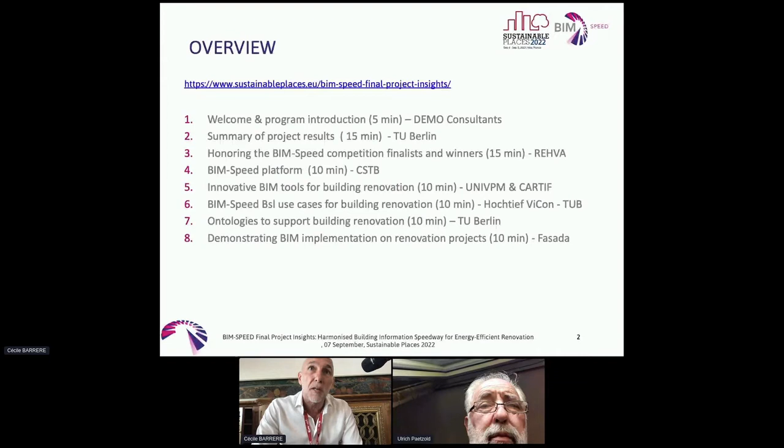I have the privilege to introduce the speakers of today, of the BIM SPEED consortium. And before doing so, there is one thing I would like to add. The project is almost coming to an end, a 4-year project. BIM SPEED, it is about speeding up BIM facilities. Well, that is really oversimplified, I would say, but it's always good to tease you a bit and to get your attention, because in the coming 1.5 hours it will be explained way better by all my project colleagues than I just did. Today is the last industry day as well, so we did see that there are people attending who used to be also present in the former industry day, so that's good to know.

And well, one of the highlights, in my opinion, is of course not only talking about content, but also giving the prize, because there has been a real competition as well in this project. But before going to that point of the agenda, I will give the floor after this to Timo Hartmann. He's Professor at TU Berlin and the coordinator of BIM SPEED, and he will give you just a highlight overview of all the project results of BIM SPEED. Then, as mentioned, we will move on to the honoring of the BIM SPEED competition. That will be done by Jasper from REHVA. And followed by, well, you could call it the core of the project, the BIM SPEED platform. That will be presented by Nicola Pastorelli from CSTB.

That's the only one who did not have to travel, I think, or just a little, because he's from this area. Then followed by some of the innovative BIM tools for building renovation. We have many more, but we have selected 2 of the best, and they will be presented to you by Serena, I think, remotely from Italy. And then Sonia, she did arrive. Good morning, Sonia. Buenos dias. That's another one I know.

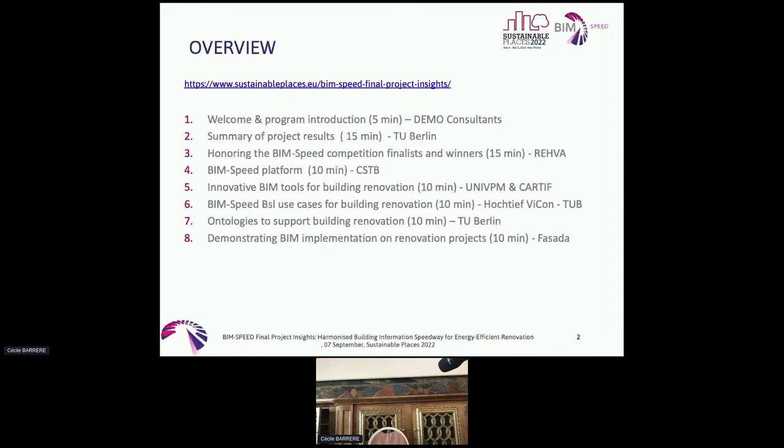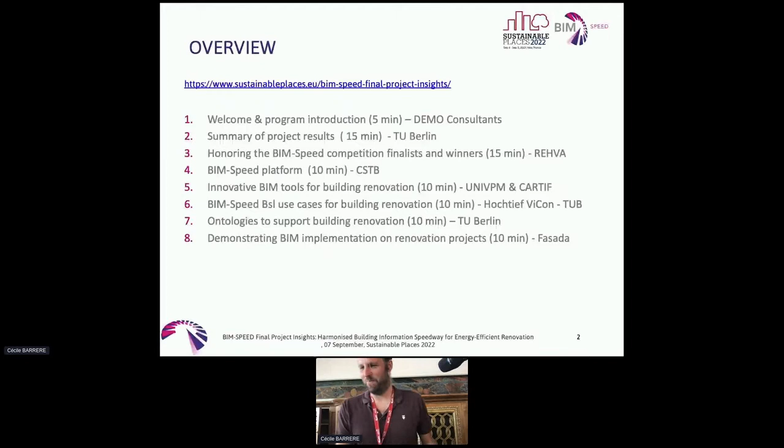So. Do you have a slide? No, you don't. I don't have slides. Thanks, Andre. It's always dangerous, right, to have the professor speak first when you're already late. But I don't know. Let's see.

But thanks for the introduction, and it's really nice to sit here as the coordinator of the BIM SPEED project at almost the end. So I guess we have less than 2 months to go, and then the project is finalized, and we had really nice 4 years together, I think, in the consortium, but also with the people that are here watching, with our user group and community of practice and so forth. So thanks for joining.

Yeah, I was asked to give an overview of the project in the session, and I'm happy to do this. And I thought, how do I do this? Do I prepare some slides and show some technical details? But that doesn't help, because the program we have will show you all the technical details later, right? So we're going to have great speakers really presenting the major innovations that we were able to come up with in the last 4 years. So what I was thinking, and I started reflecting a little bit, is also looking a little bit at the history. So I guess it was more than 5 years ago when Rizal Sebastian, who's no longer on the project, contacted me and said, hey, there's this great call out there, BIM for renovation.

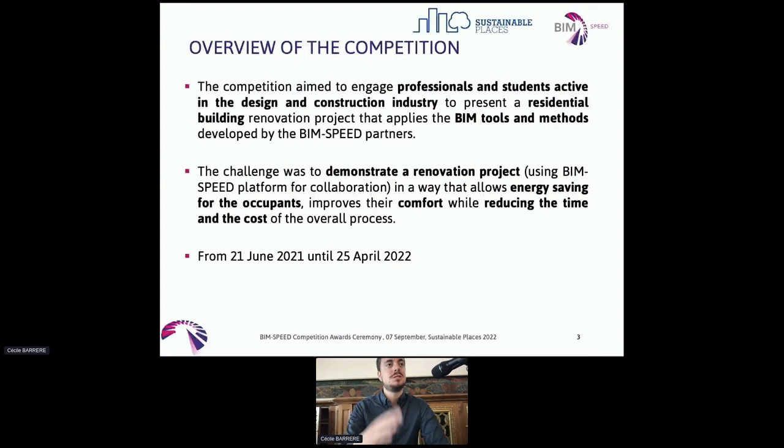How did they have to submit their project? They had to use the BIM SPEED platform, to which they had access through the KROQI platform. They had to fill in a report describing all their results, so the indicators I just mentioned regarding energy savings and comfort. They had to describe how they accomplished this by using the BIM SPEED tools and also other available tools, and how they combined them.

Next to this, they also had to submit an IFC file with their BIM design model and a proposal for it. And last but not least, some visual materials and an infographic of how the project looked, that gave a better description.

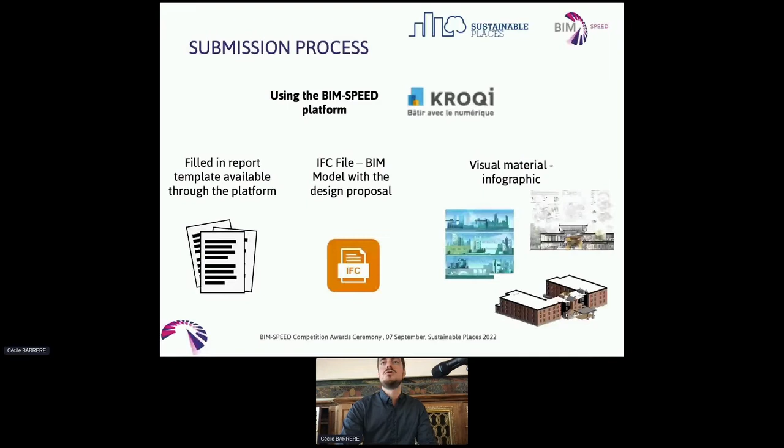Who were the jury? The jury were a combination of people with an architecture and engineering background. It was a good mix of people from research, academia, industry, and also real estate finance, so a good mix of opinions. I want to thank the whole jury for their participation, and specifically Chiara Di Pasquale and Andras Ronay for their very active contributions to the competition. So really, thank you to the jury.

Regarding the teams that competed, there were 8 registered teams from across the world, not just from Europe but from Africa and South America as well. It really had a global scale to it, and the teams made a strong effort to use the BIM SPEED tools and demonstrate their results.

Now to the key part of the presentation: the award ceremony itself, and who the winners are who will receive this trophy and the other awards we have lined up for them. Unfortunately, the winners could not join us in person, but they are here with us virtually.

And the winners are Team BIM from ENSTP, the National Advanced School of Public Works from Yaoundé, Cameroon. They had very good feedback from the jury and really made a lot of effort to demonstrate the energy savings and comfort in a project provided to them by BIM SPEED. Congratulations in particular to Idris and Charlene, who will be presenting. Thank you for giving us the floor.

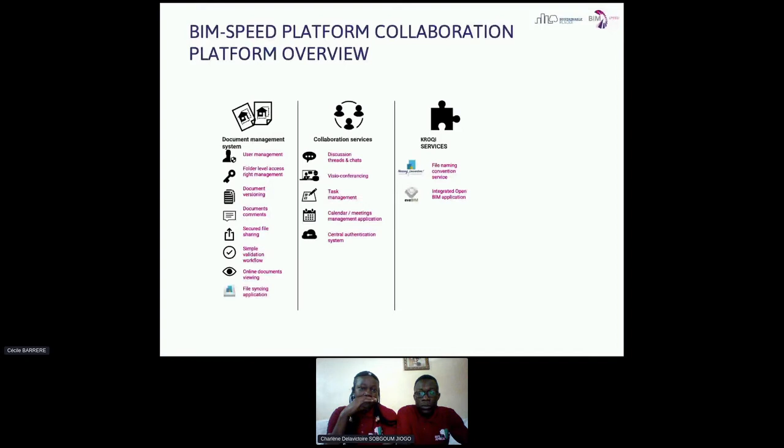On top of these two main types of collaboration services, there were already pre-existing KROQI services like the naming convention we just heard about. CSTB is also providing a tool named eveBIM, a BIM viewer you can install on your machine to view BIM files.

This is where, on top of that, we extended the platform to bring extra services showing what kind of renovation services could be integrated inside the platform.

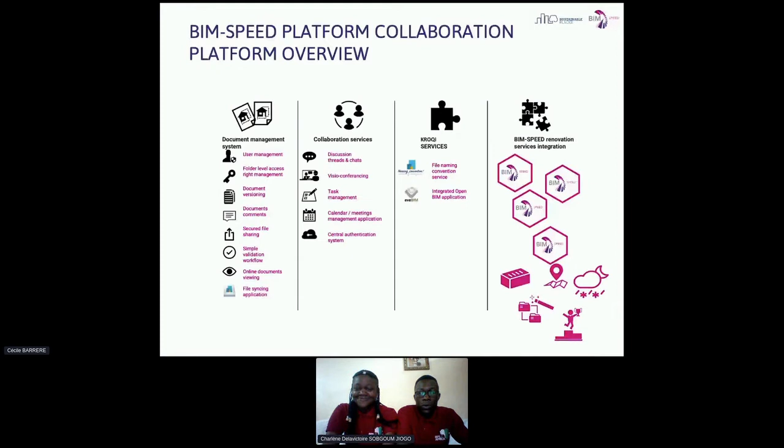We extended the store with a packaging option where we can create a set of services dedicated to renovation. We created features especially for the competition we just talked about, to enroll users and share files and things like that.

Very briefly, this is the core of the platform, and all these services are exposed through APIs. This is where we integrated different types of services relevant for renovation, and the project was framed so that each step of a renovation has a set of services which was demonstrated.

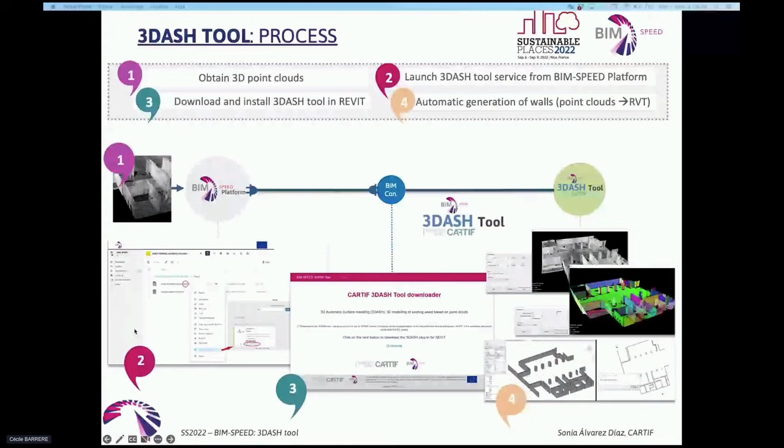I'm going to show you a demonstration in the Warsaw demo site in Poland. But this tool was also tested in another demo site of the BIM Speed project, the Vitoria demo.

About the Warsaw demo site, as I mentioned, the main goal of the project was to renovate and adapt an underground passage. The documentation of the existing space was out of date and only available on paper. It was also a pilot project for the city of Warsaw to test open BIM standards.

You can see here in the image that on the left side is before the preprocessing of the point cloud, and on the right side is after the preprocessing. You can see a red line - that's because we decided to only do this demonstration on the left part of that line.

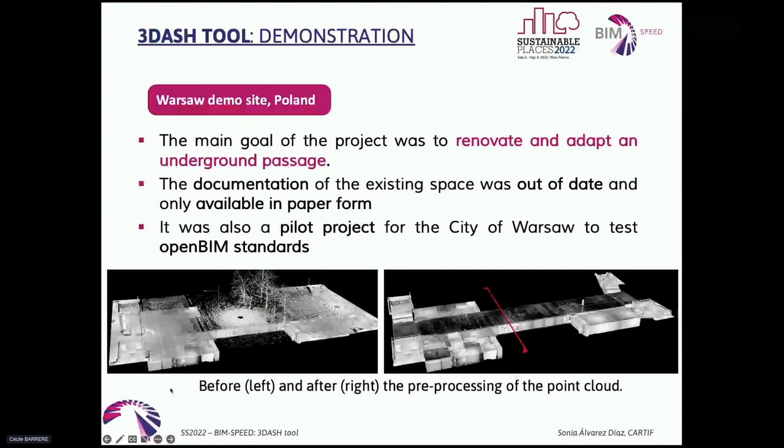So here are some steps of the tool. The user needs to start the tool in the Revit software. The first step is to load and analyze the point clouds. You can see here the first step of the tool - you have to select the point cloud and the 3DASH tool starts working.

The second step is the pre-processing. You can see here the point cloud. Depending on the parameters the user decides, those point clouds are selected more separately or something like that. So the user can modify the dimensions or the final results of the tool, depending on the parameters.

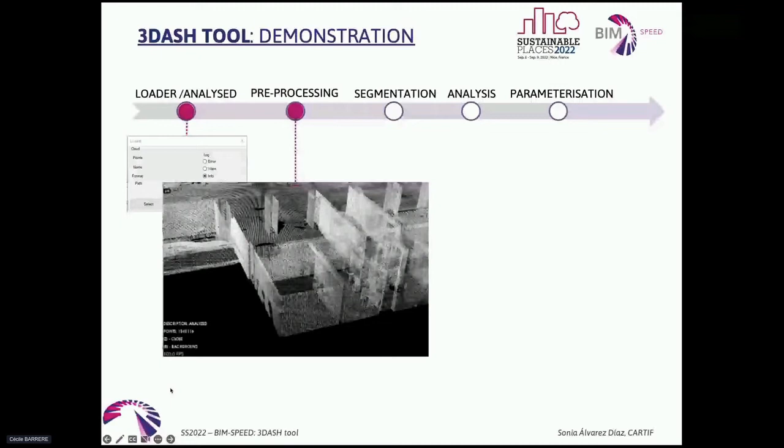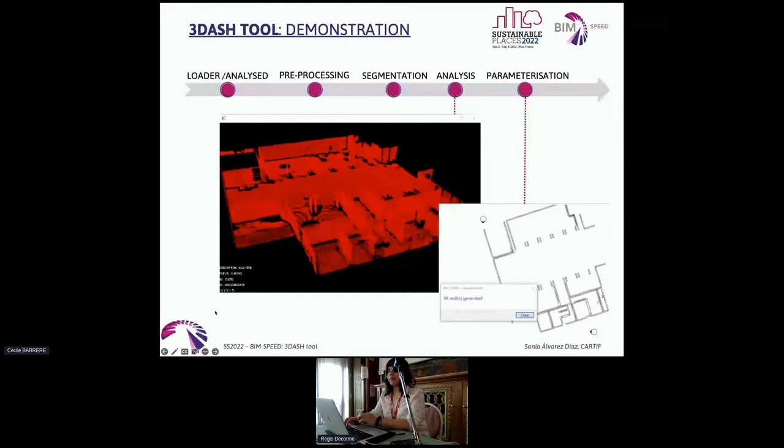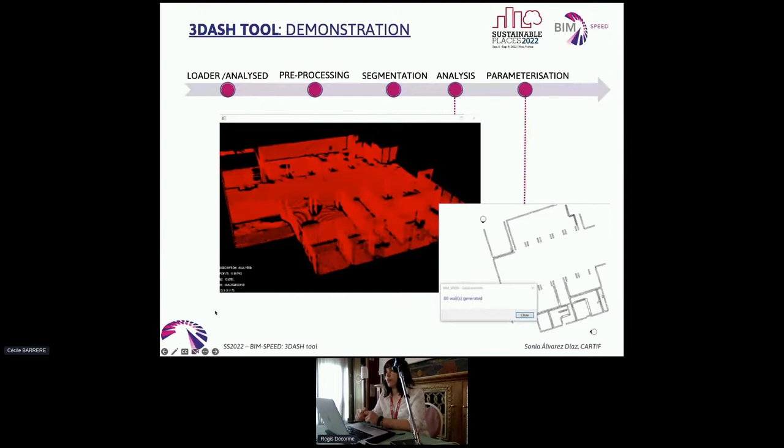So the last step is the parameterization. In this step, to generate the walls, the user needs to decide what type of wall is going to be created. All the walls have the same properties in this case. So here, 88 walls were generated by the tool.

So here are some results about this demo, comparing the use of the 3DASH tool with the traditional way. For the traditional way, the creation of the model from the pre-processed point cloud took 2 hours and 10 minutes, and 36 walls and 12 columns were modeled. Using the 3DASH tool, as a final result of the application, in this demo 88 walls were generated automatically in more or less 2 minutes.

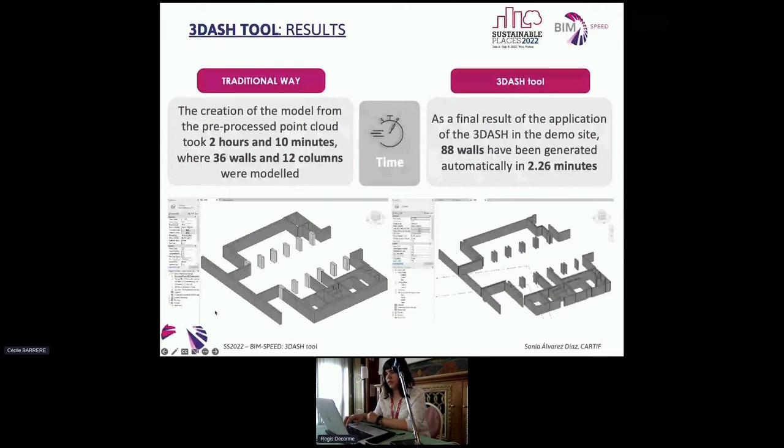So as a consideration, the use of the 3DASH tool can reduce time because of the generation of models, and for comparison with previous systems of modeling the building.

Compare this to the traditional way, where the user needs to generate the walls manually using the point clouds as a template. This is all manual selection of the points.

Here are some publications about the use of this tool. The first one was presented at a congress, comparing the scientific approach with the traditional one using the 3DASH tool. Another publication covers the use case for Building Smart, which my colleague Sharon is going to talk about later.

It's the next one. Yeah, is this one? No, the next one. Oh, sorry. Is this the one? Mm-hmm. Yeah.

Unfortunately, there's 6 minutes left for each. Okay, sure, I got it.

All right, so I will start with our use case documentation initiative at BIM Speed. Just a quick overview: as we all know, the BIM Speed project has developed several tools and methodologies for efficient renovation practice. As a standardization initiative, our coordinator, Professor Timo, came up with this initiative to document some BIM Speed use cases on the Building Smart Use Case Management System, capturing these tools and methodologies within information delivery manual standards and requirements.

Based on this, we have predefined sections of a use case document based on IDM standards, which has 3 sections in general: a general use case definition section, process definition, and exchange requirements. But with the initiative of Professor Timo at TU Berlin, we tailored this definition to also contain BIM Speed objectives validation and demonstration of use cases on project sites.

With this, we also provide users an example of implementation of these use cases, making it more easily accessible to all users in the built industry. We have 4 sections of a standard use case: the first, as I said, is a very general use case definition.

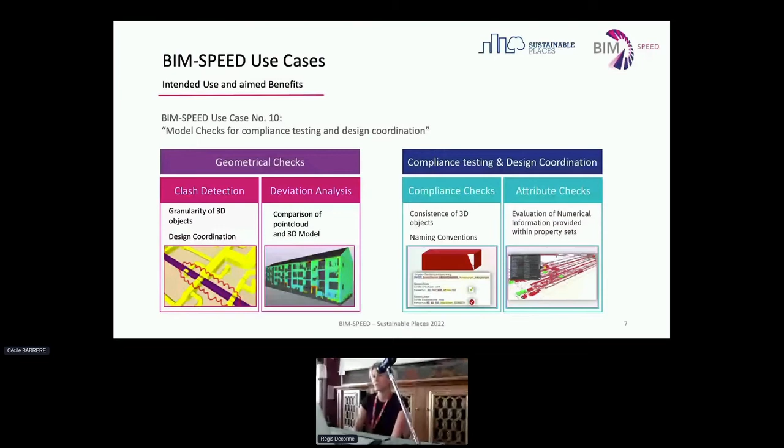That's a lot of information for the user, and we took this information and defined, out of only this deliverable, 3 use cases in the buildingSMART Use Case Management System: 2 about the geometrical checks, and 1 about the semantical and numerical checks for compliance testing and design coordination. And this is where I want to step in.

The use case we described provides in the first section the objective of the use case, which in our case is to assure that the information within the model is correct and in the right range of required information or values. So the scope is to provide reliability on the data inside the 3D model.

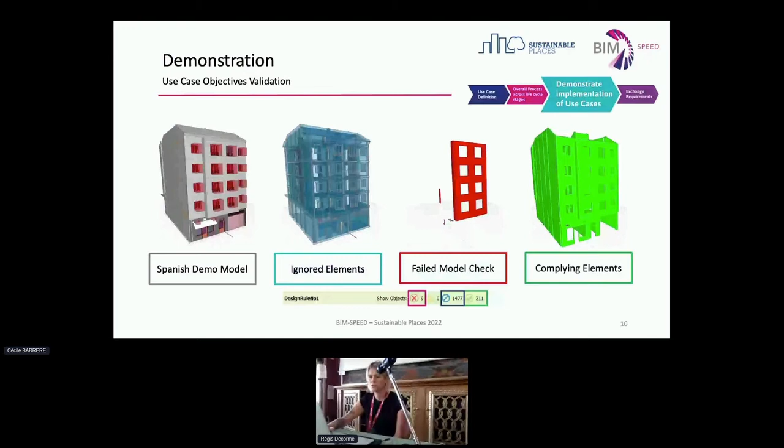We found that there are 9 elements that either did not have the parameter within the model information or had a wrong value. But luckily, the green ones are the elements that are fine, and that's a good result for this check rule, in my opinion. So the last slide for the use case description is a look at the exchange requirements.

As mentioned before, we focus here on the file exchange formats and don't break it down to each model element and each parameter. As input, we need the standards existing in the specific country, documents like the BEP, MIDP, and modeling guidelines, and all this forms the base to define the model check rules. Of course, we need an IFC file to be checked, due to the open BIM approach we are following. It's only relevant for IFC files.

The output will be, if needed, a report as a PDF or Excel file, but mainly BCF files that can be directly imported into the common data environment and given to the BIM author so that he is able to update and correct the model. By the end, we will have a checked 3D model that is compliant with the requirements and can be handed over to the following process step in the complete design coordination process.

So I'm coming to the end, and I will give you a short overview on the BIM Speed use cases that are already published and will be published. So we have 14 use cases that are already published and available on the UCM. We have 12 more work in progress in draft, and we are planning to publish them by the end of the project. So in total, we will have 26 use cases published on the UCM.

Okay, good morning, everybody. My name is Jerson from TU Berlin, so I will go very quickly to try to catch up. So sorry if I go very fast through some of the slides. So the idea today was to present to you some of the results regarding the ontologies. So I will talk to you about what was the motivation.

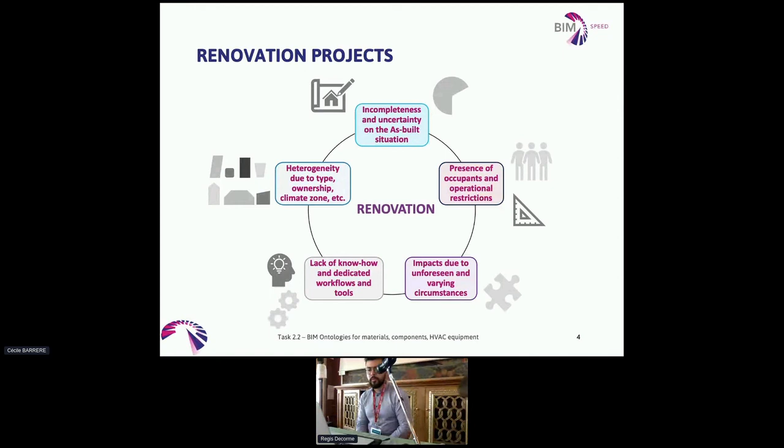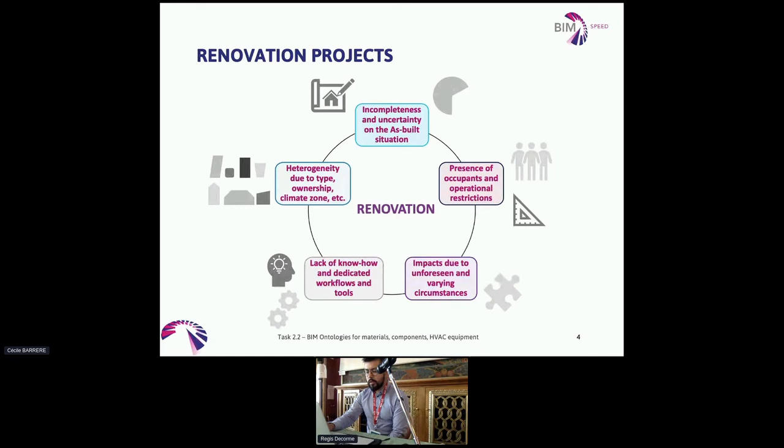As Timo mentioned at the beginning of the presentation, we have different characteristics of challenges in renovation projects, and we have a lot of heterogeneity from the building stock and so on. The presence of occupants during the renovations also changed the way the conventional construction activities are performed. And all of these bring different challenges that we think that if we are able to map the knowledge from the different experts and the different stakeholders regarding these different tasks and this domain, we can support or enhance the way the workflows are performed in renovation projects.

So for that, we were talking about knowledge representations. For those that are not familiarized with the idea, it is basically a set of symbols and text that describe information from a domain to help users to understand better that domain. If we think about ontologies, then we should talk about the concepts and the relationships between those concepts. And basically the idea is that this model will provide also a common vocabulary for users and will help create a shared understanding of the domain that we are studying.

So having a knowledge representation, having a model for a specific domain will help to improve the consistency and reduce ambiguity. It will help the interoperability, the reuse of knowledge, and the sharing of that knowledge. So going back to the challenge that we mentioned before, all these advantages of having a knowledge representation will help to tackle some of the challenges or the barriers we mentioned before.

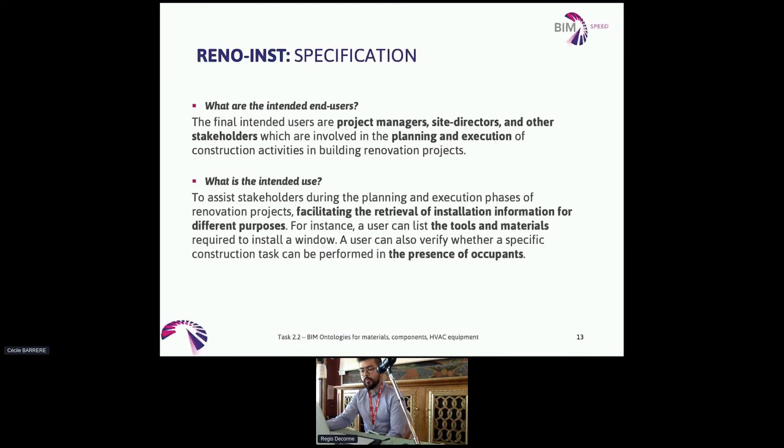The end users are project managers, site directors, and other stakeholders. And the intended use is to facilitate the collection, management and retrieval of key information to support the planning and the execution of the renovation activities. This is an overview of the model. One of the more important concepts that I would like to highlight is the constraints. We talked to experts, and they mentioned different restrictions during renovation projects, like the limitations of the space, the presence of occupants, so the activities have to be performed differently. So we map those constraints, and we included them in the model.

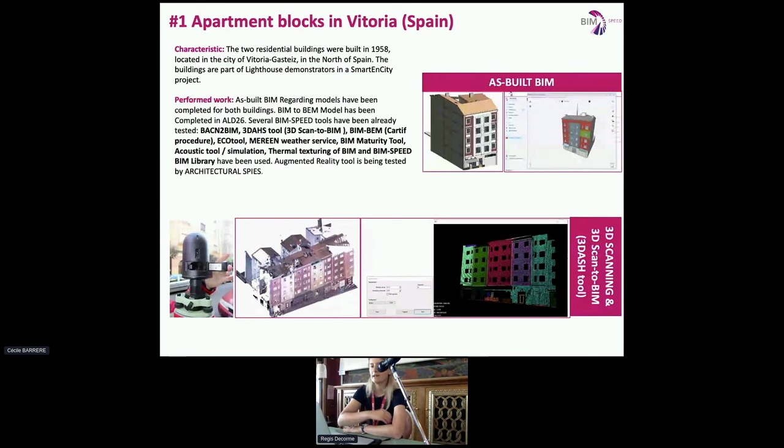Another tool that we have tested was the BACN2BIM tool. So we have access to all the data gathered from the building, for instance humidity or temperature, and we can access them with the BIM Speed platform. Also on this demo site, we have used visualization tools with augmented reality. So for instance, if the building is after renovation, we can see how the envelope looked before the renovation. And also we can see the thermal performance of the building with our mobile phone.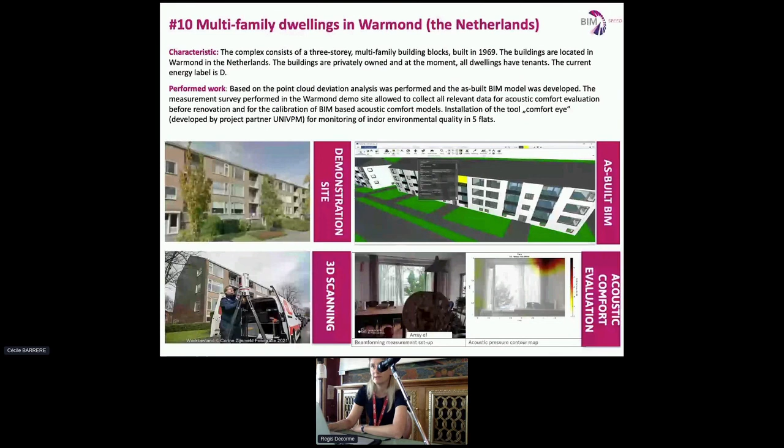Also in the building, Comfort Eye tools were installed, also developed by one of our partners. And this tool helps us to gather information on indoor air quality. And so later, this can also be very useful information for the preparation of the renovation and selection of the best renovation scenario.

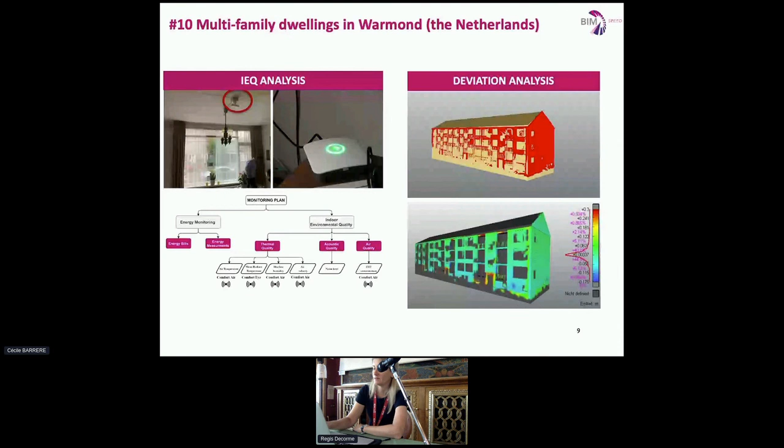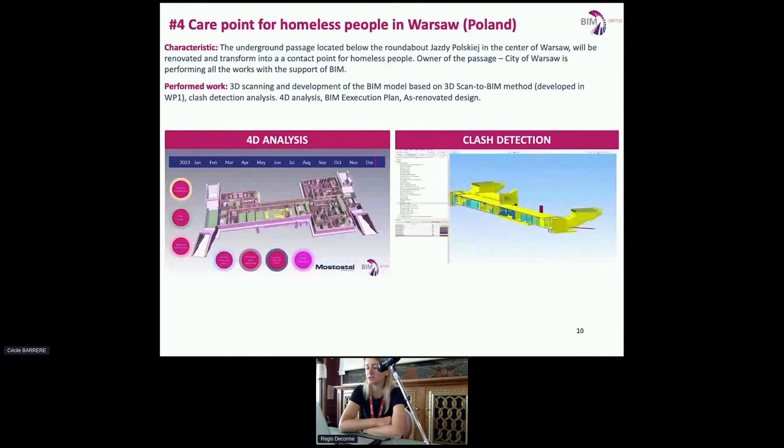Here, another demo site that is very interesting. It's a care point for homeless people in Warsaw, in Poland. It's not a typical residential building, but an underground passage. And here we decided to support the investor, the city of Warsaw, so they can better prepare for the construction works. We did the 4D analysis on the construction site works planning, and also the clash detection, and really many clashes were noticed. So in general, the idea for this demo site was to help prepare the investor for fast and efficient construction works.

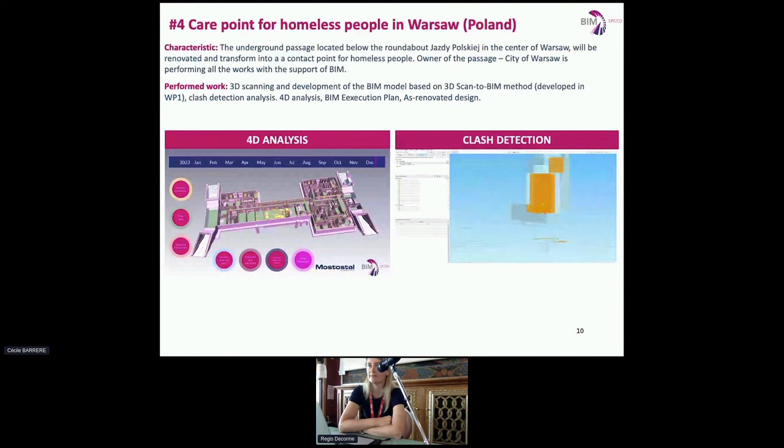Now a few words about another development of our project. I think it's also very interesting from the practical point of view. Here we have analyzed how virtual reality technology can help to organize and perform health and safety trainings on the construction site. As you know, this part is very important and it's a compulsory part of the construction work on every construction site.

So with the help of the VR tools, the white collar worker or the blue collar worker can be moved to virtual reality, and believe me, in that way every worker memorizes much better how he or she should behave in a hazard situation. I really believe that such a solution will soon be our everyday solution in order to improve health and safety and also minimize the risk and the accidents that happen on construction sites.

And the last development that I will talk about is a BIM passport. So it's a digital document for a building in which we can assess the quality of the available building data. So to structure the information that we have, for instance, to assess the quality of the point cloud or drawings or BIM model or other data from the monitoring, and how we can use that data for further analysis that helps us plan the renovation scenario in a better way.